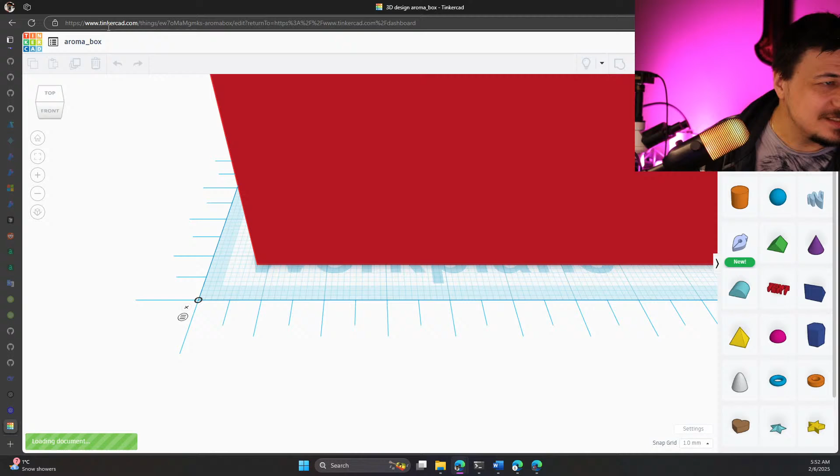And I developed some basic 3D stuff - very basic 3D stuff. It's very simple. Let me move myself to a different angle on the screen, maybe here. So yeah, you have that 3D surface here, 3D base, and you can just put something here and do things with it.

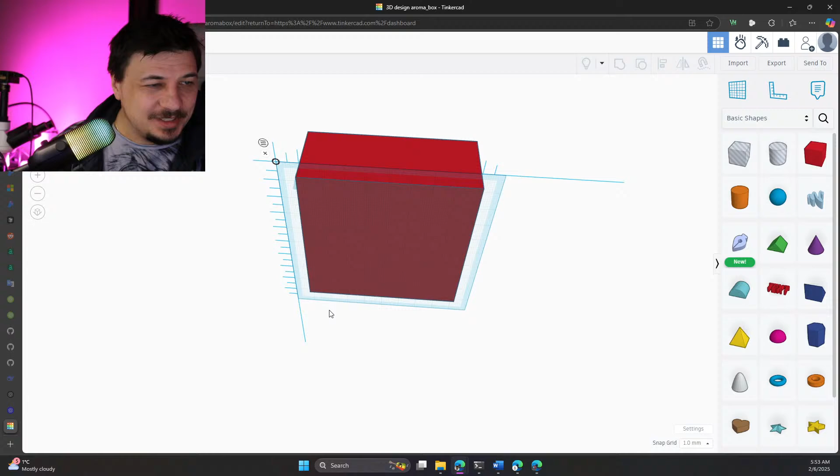So basically I created this myself today in just a few minutes. But the thing is, the beautiful design, after printing on a 3D printer, is slightly too small for bottles. I mean, they fit, but once they have something on them too, they don't fit. So yeah, it's not quite right for my table.

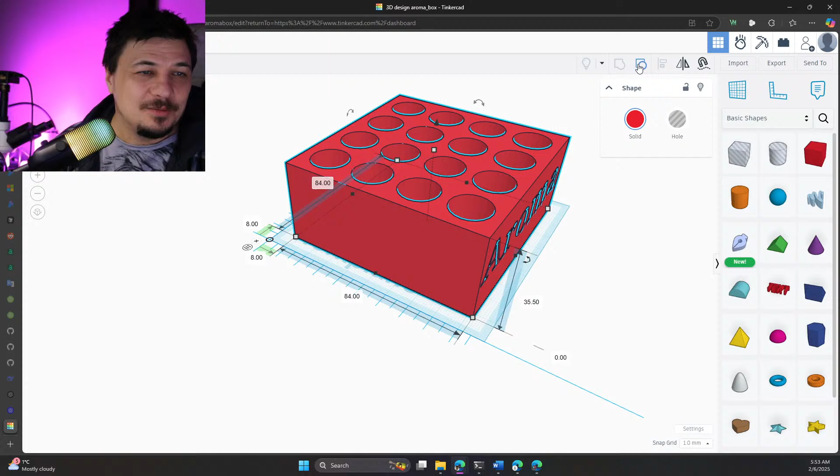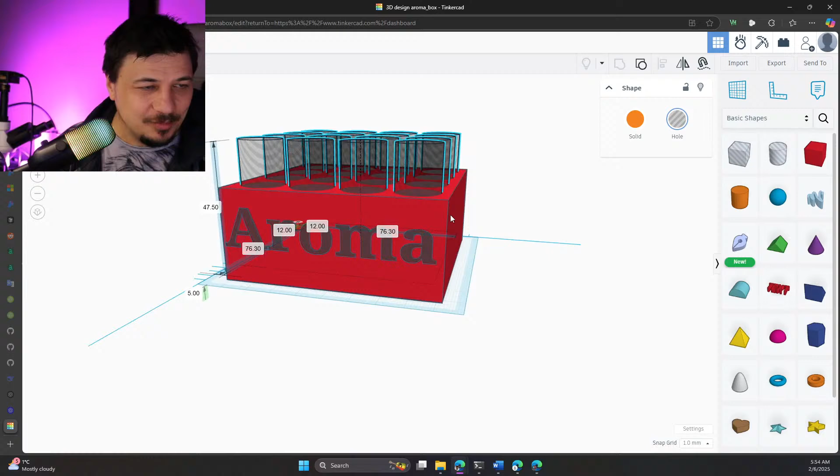So I decided to very quickly fix that. I need to ungroup it. And you see the cool thing here - if you, for example, just remove it, it will be removed. And because it's set as a hole, it's so simple to create even very complex things here. They're still grouped here, so I probably need to ungroup them before I can do anything.

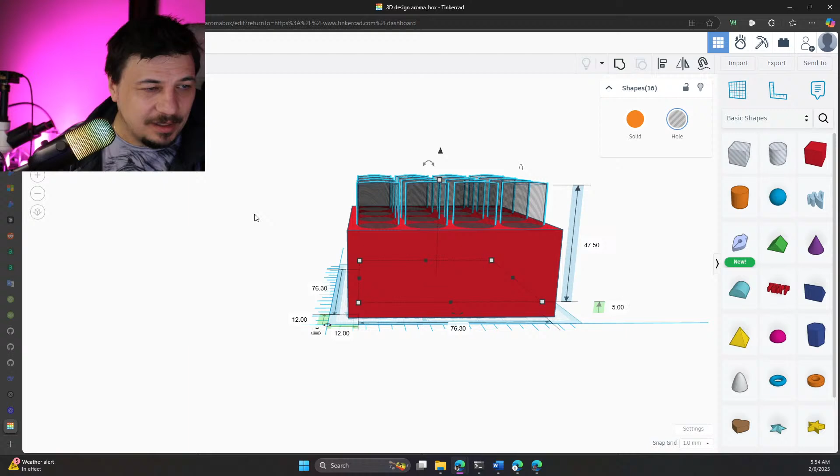Okay, now what? How can I choose only one single? Is it possible? I'm not good at selecting something here. Okay, now I was able to choose something.

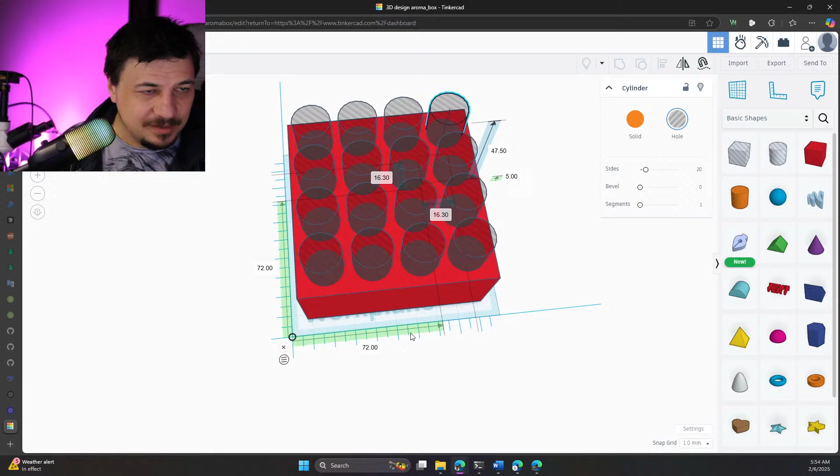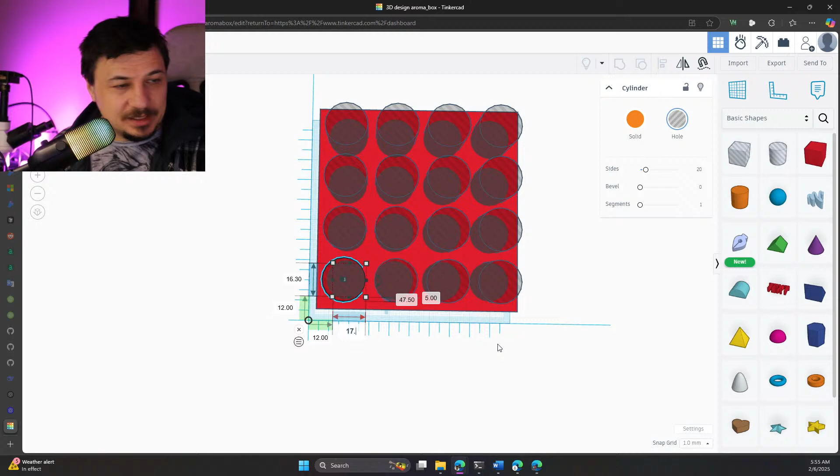Maybe if I go here, it's 16.3, 16.3. Okay, maybe I need to choose something more. Let me move it so I could see. Let me put like 16.5, and 16.5. Is it too much?

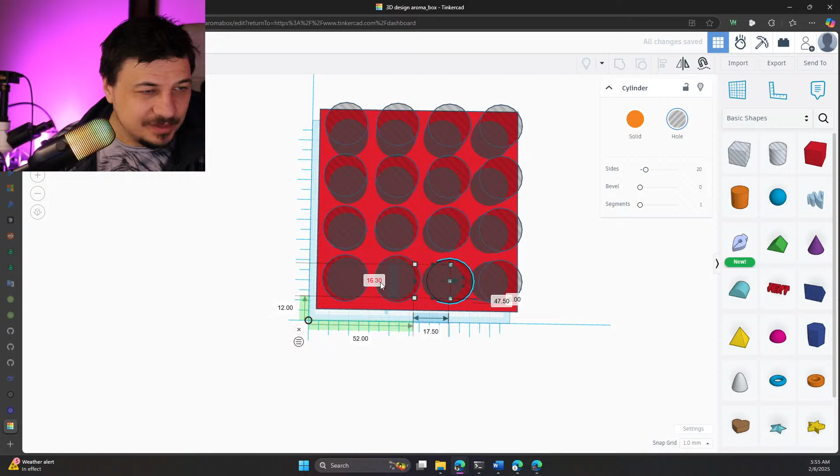Where is my point? Okay. Oh no. Yeah. Maybe I'm doing too much now because, oh interesting, I believe I changed everything for them.

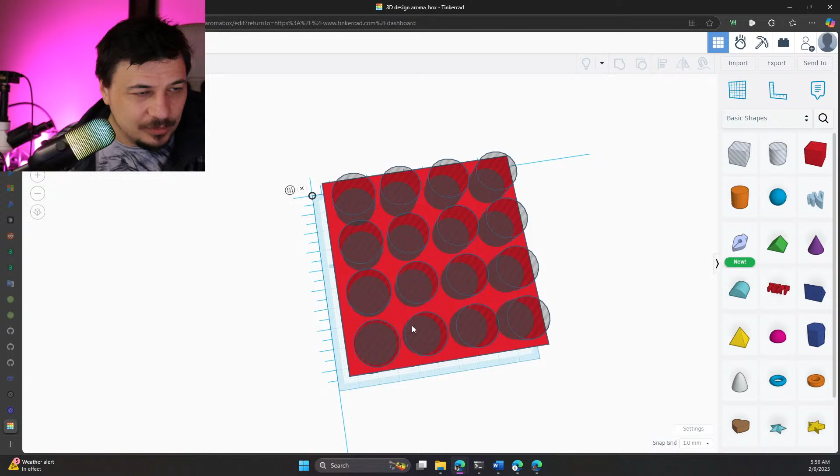So they still look valid, just slightly bigger, correct? 16.5 and looks good. Segments 1. Okay, because

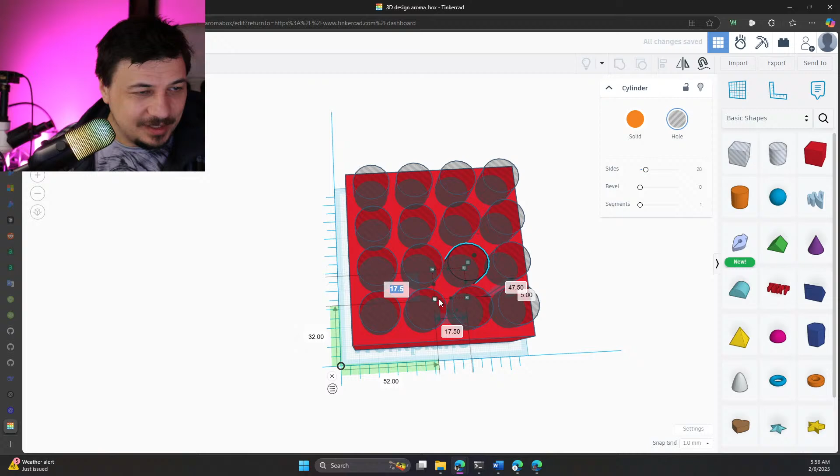I don't want to, so I just duplicated them last time. Yeah, I created a perfect shape and duplicated it, but it didn't - I mean it's working, but I believe now it would be just faster for me to go and change all the dimensions here.

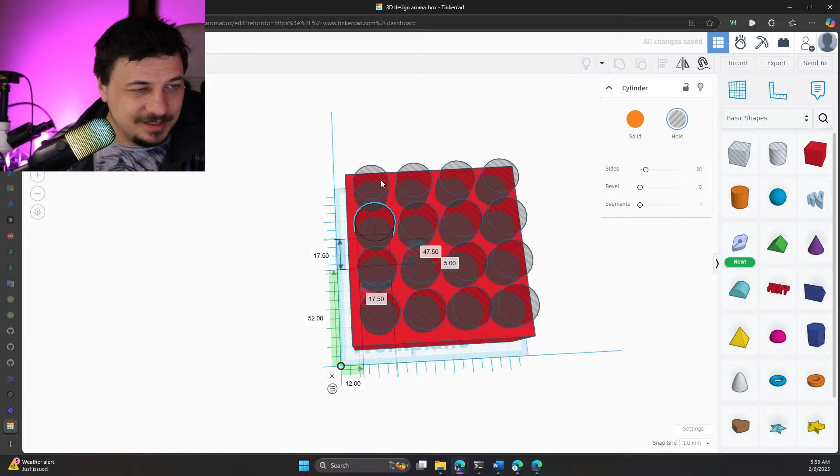And probably during one of the next streams I can show you the result, because it will not be printed in 1 minute - it requires about 2 hours of print. But yeah, my previous print was not exactly successful.

And let me see, maybe from the top, like this. And it looks - maybe it looks not bad. So 12, 12, maybe it should be 11 now.

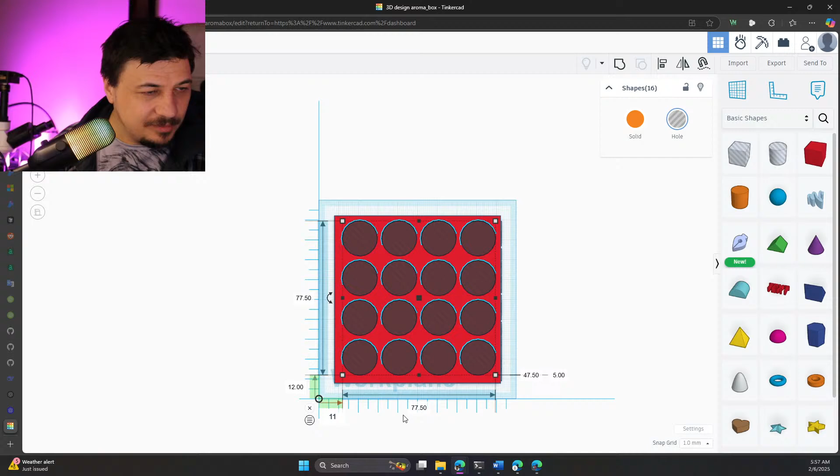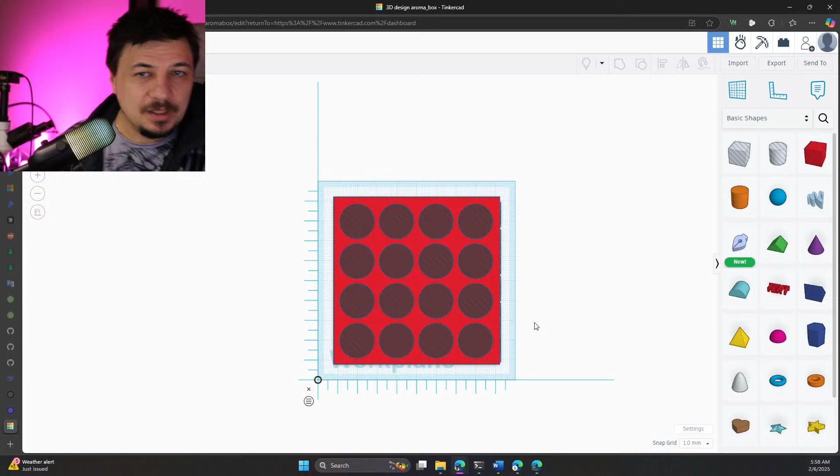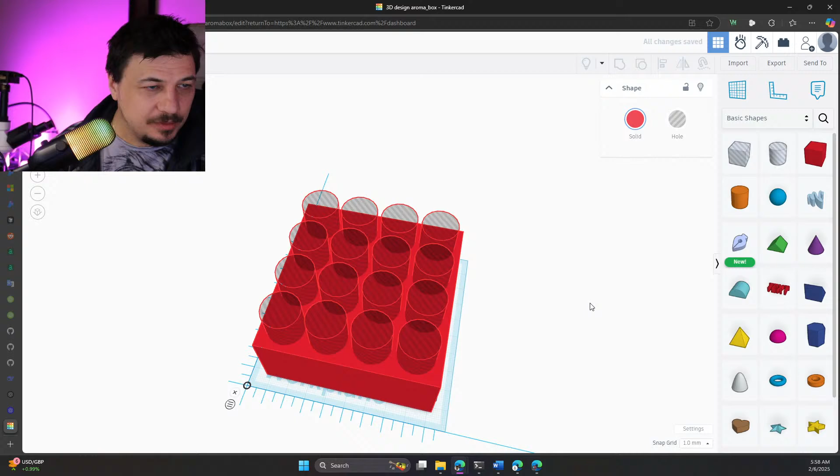Okay, they look more or less okay, and the aroma is here as well. Okay, so now if I choose all of them once again, group, now I choose those, and what else could I choose?

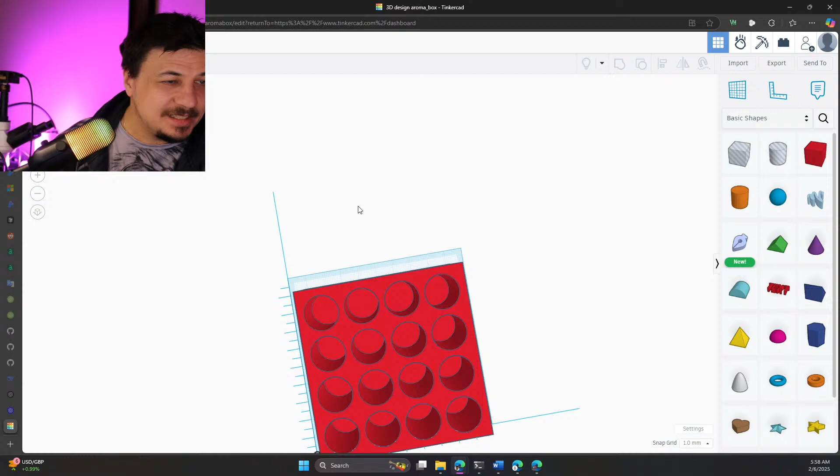So looks like now I have only - yeah, I created the design for one of my smallest printers, but looks like everything's not on my table. It worked well, but then I printed it on my other printer, and it was printed much faster.

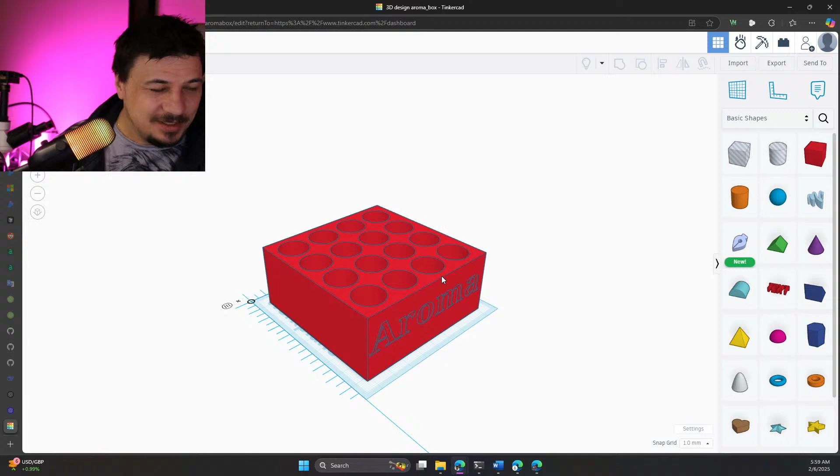And I understand, okay, looks like my bottle's not completely going in. It's for about 16 bottles, special bottles for diffusers, aroma diffusers at home, and they took a lot of place in some special box, so I decided to print something for them.

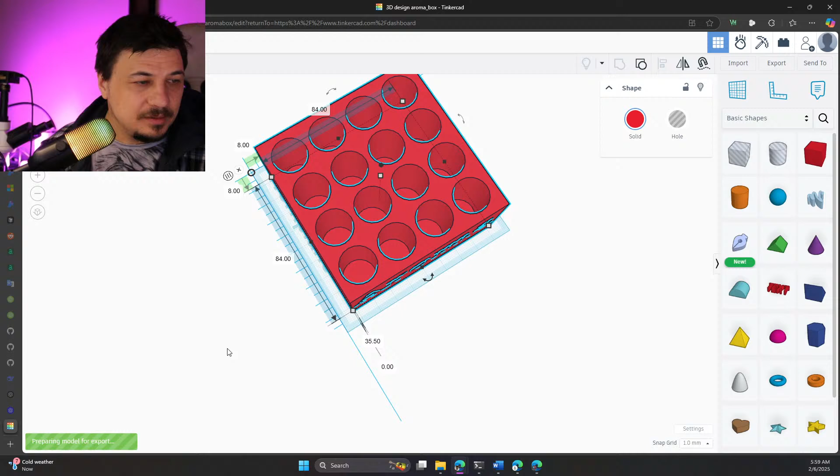Okay, now we could just export and say it would be an STL - let's call it aroma box, and it would be version 2. And that would be it. We say export in STL, and it's exported.

Do I have any program to do this? What is the program for my printer? I just installed it today.

Okay. Maybe I need to search for 3D. No, so not exactly software development, but related to some software stuff. Sync. Okay, it's called Orca. Orca. So I believe Orca is what I'll use right now.

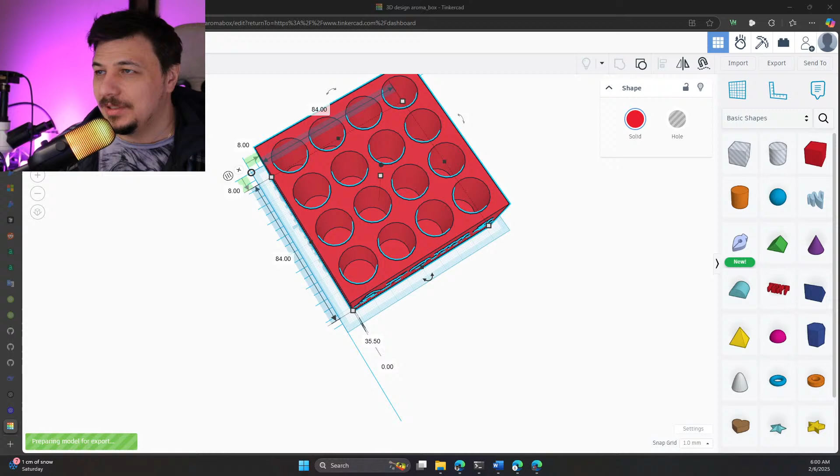I'll move it to the screen. And another thing, that thing is really, really great. So if I click, for example, new design - can you show very quickly - it's allowed to do everything. It's allowed to do custom sketches, it's allowed to use shapes from multiple things. It has a unique shape generator, and features, and it's allowed to do like mostly anything.

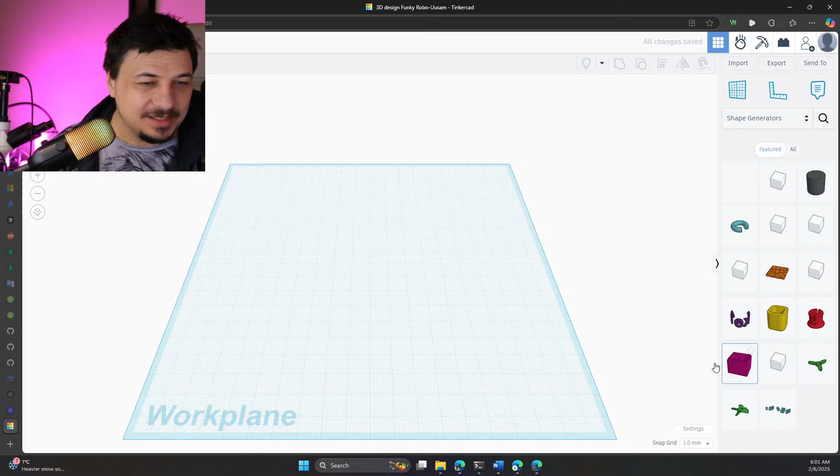Like custom box, for example - you could put some custom box here, please. Okay, you could make it bigger, and you see that is custom box 1. Let's see, 25 - let's make it also 25. Wall thickness, okay, and for that we will also do 25, 25.

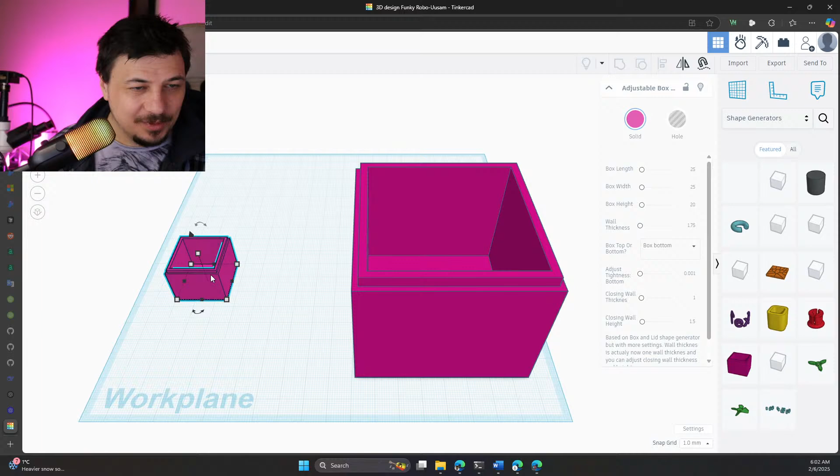But I did it wrong. Closing wall height - no, 25. And here, 25. Box height 20.

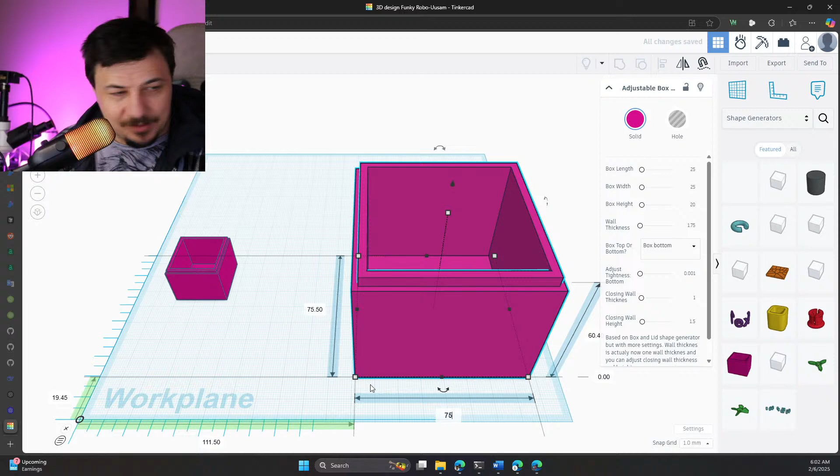Why are they so different? Okay, because I need to put a line here, and it would be 75. And that would be 75. We can do that the same, but here we can just choose box top.

Nice. And now we basically have 2 boxes - one is a big box, and that would be a lid for that box. And then we can add multiple other stuff.

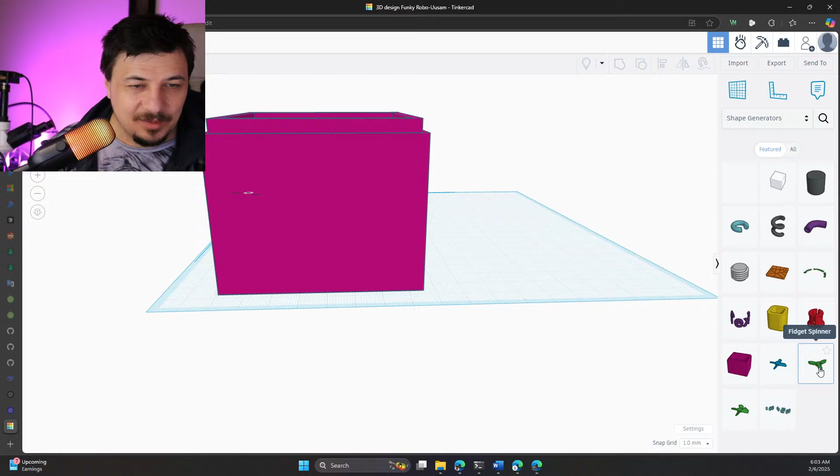I don't know why it's not loading some models here. Favorites - I don't have any favorites yet. Shape generator, and now slightly better, but still some windmill or some ISO metric threads, which probably also could - or some snap and socket. So you can put one snap and the other would be a snap hole.

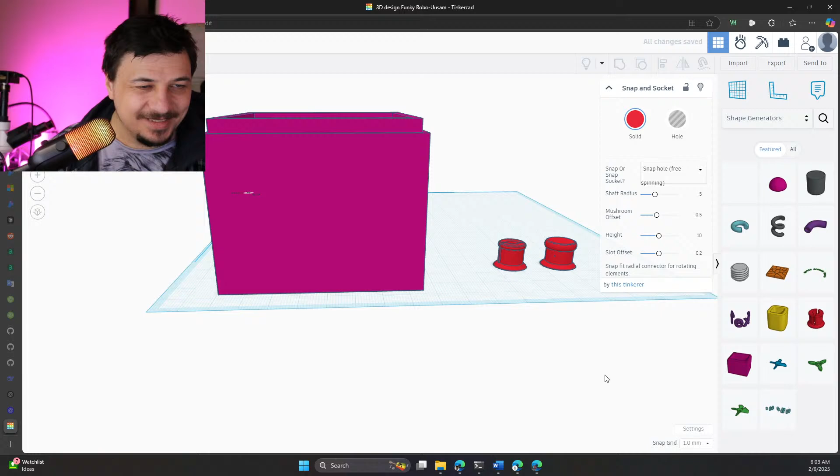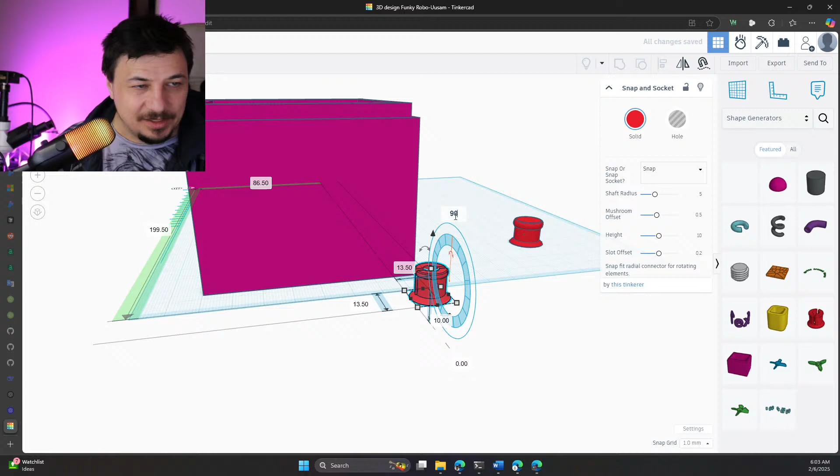And of course you're not putting it like here, you put it on some design, so you just need to somehow turn it, yes, like 90 degrees. Then you could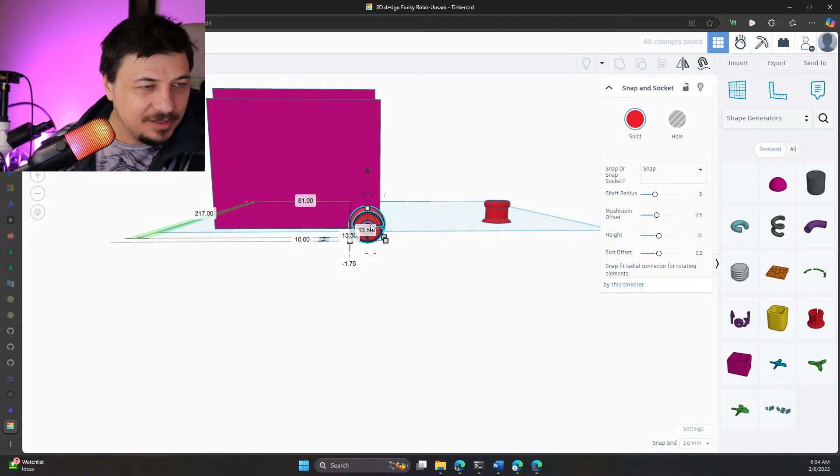So you could do everything with those numbers, because I put the ruler, but also you can use your keyboard probably to find the proper place, mouse, and let's use that thing. It should go to

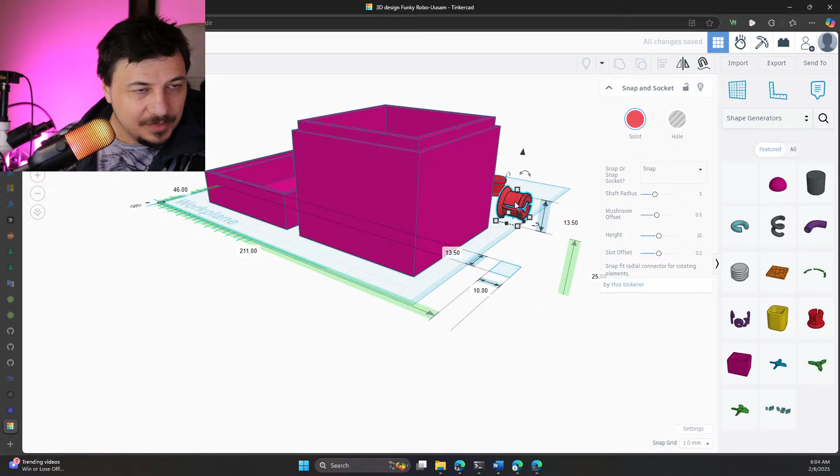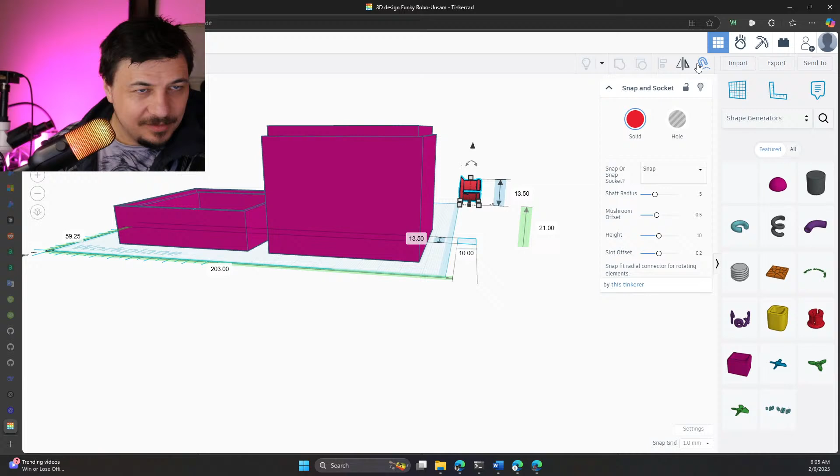I just need to release it now, probably like that. And oh, it's doing not the thing I expect.

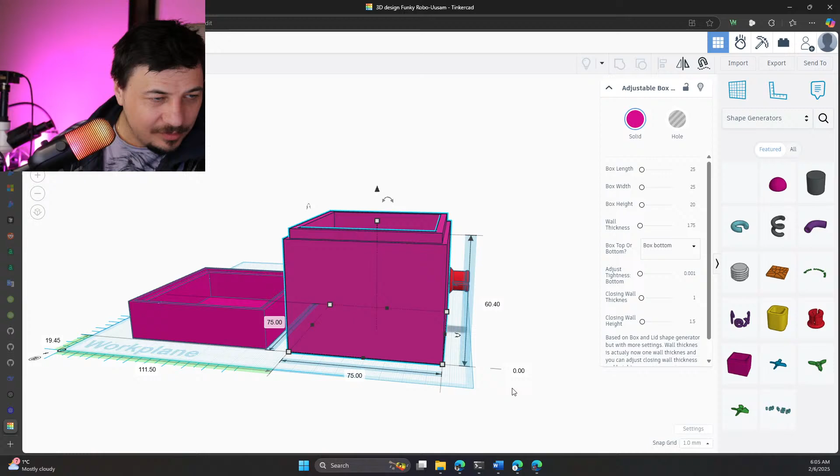Okay, anyway, you could do it with the mouse, as we said, so you could see the distance between this and this is very small, and you could just connect it, and then whatever you have that connector on could be connected to this one, which is a pretty cool thing.

And it's just one example. I'm still learning it, I just discovered this today. So many other things here, and if I do more shapes, there would be so many text options, so many possible auto-generated shapes for some development, some nice surfaces, snowflakes, cylinders, and so on. I believe there are maybe hundreds of shapes you can generate and use.

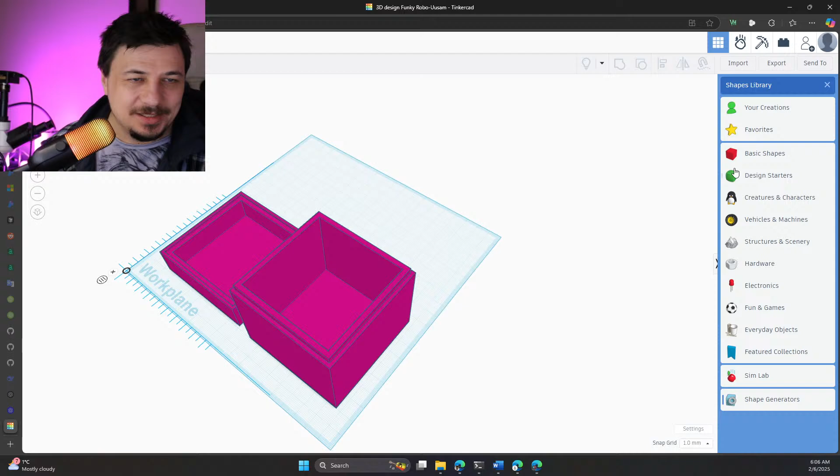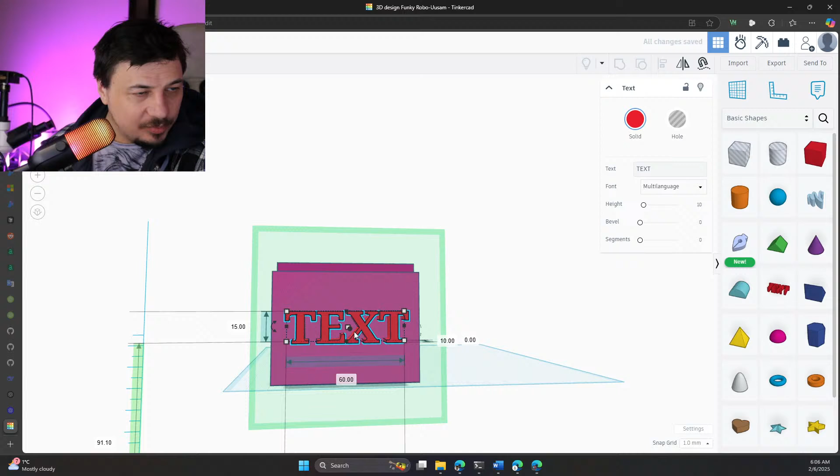And it's very, very simple principles here. For example, you could just use some text. You can put text on top, and maybe make it slightly smaller, like 60, maybe 15. Yeah, looks good, just put proper text. You can make the height slightly bigger, and say 'romantic.' Oh, it's too big text. Okay, 60, and height would be like 15. Okay, height 12. Nice.

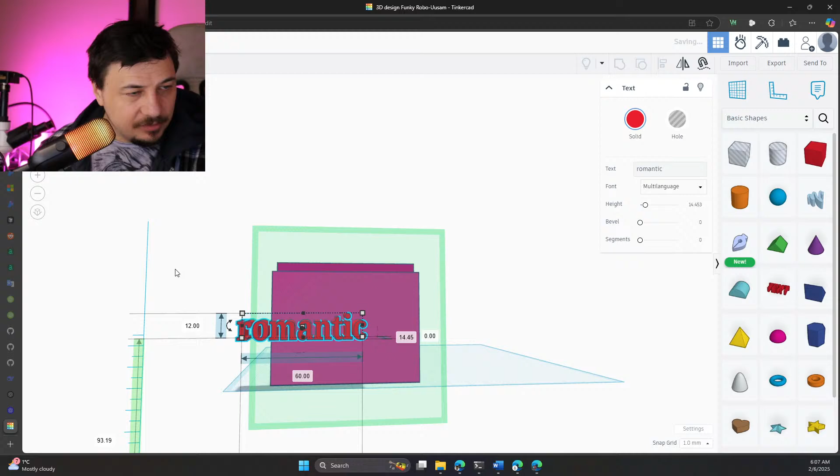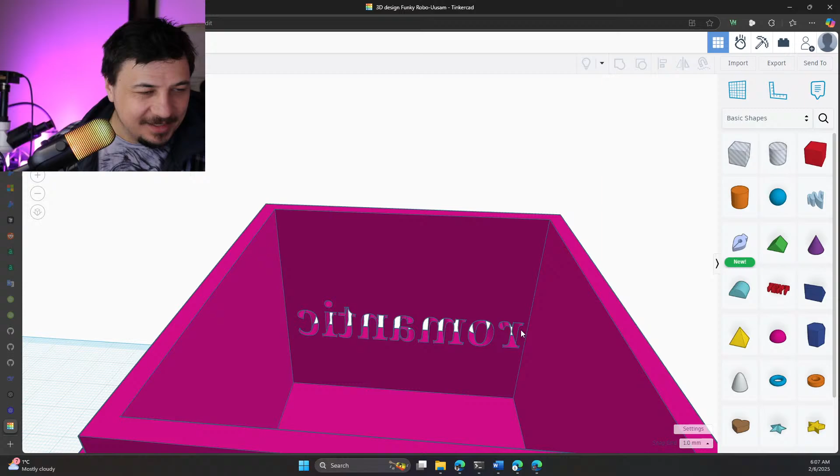So yeah, that's what you do, and maybe it would be hole, and when you move it to the inside like this, nice, and you connect and say I want to connect that. You will stop looking at the shape, but you will see that it's now that 'romantic' here, and it doesn't enclose in the box, so it's nice. You can put a mouse here and it has something to breathe because it's romantic here.

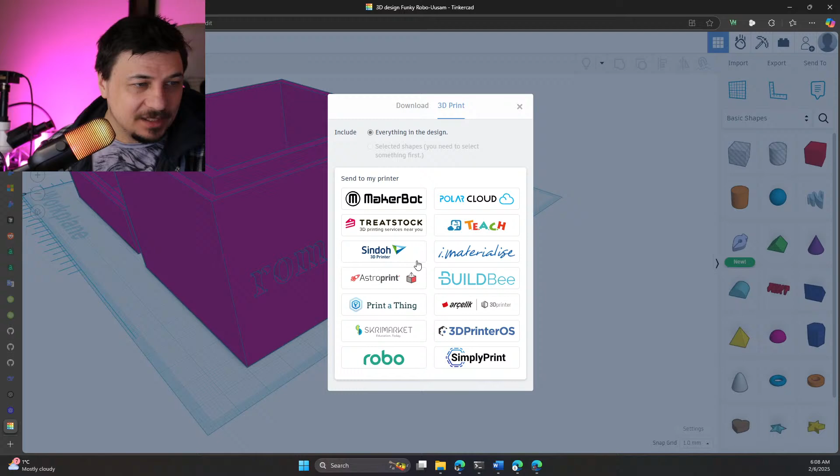So again, as we said, you can immediately export into some of these formats, or even 3D print if you have a connection to one of those clouds, or send it to a company which sends it to you printed, and that's it. You can have a nice box with 'Sport Romantic' on it.

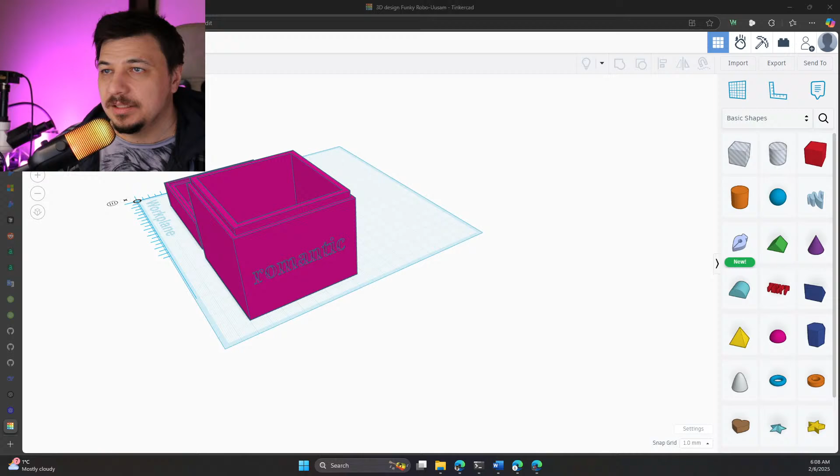Okay, and for me, I just did today one of the projects. So I'm just creating a new project, and I need to add another one called Aroma Box number 2. Where is it?

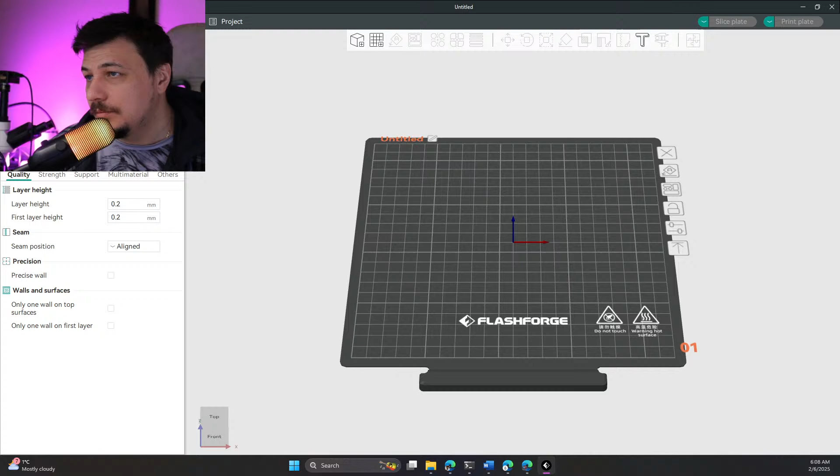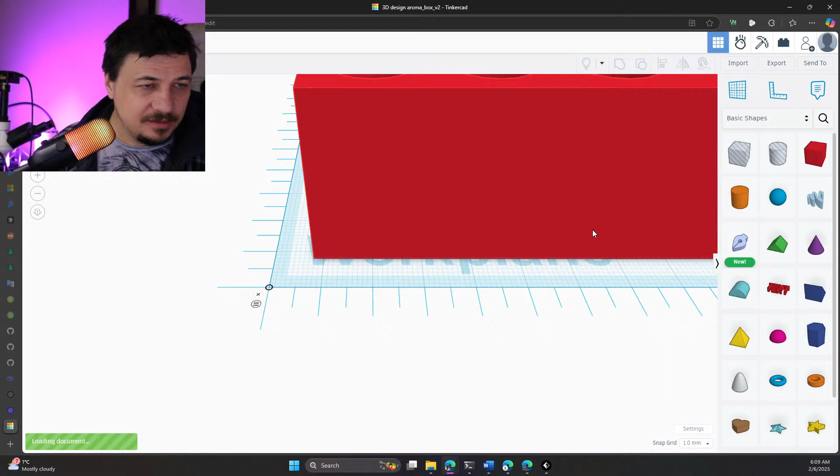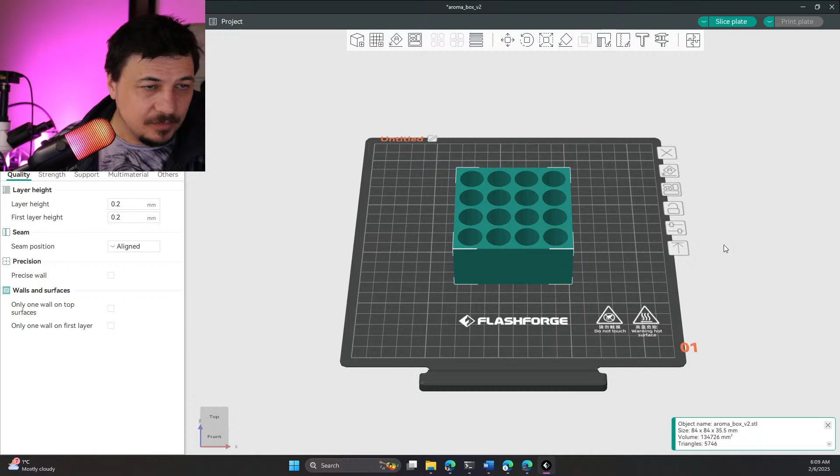So let's double check. We have Aroma Box number 2, and we said to download it, correct? So we set export to STL file, preparing Aroma Box version 2. Okay, and now if you say load, okay, now I could see that. Cool, so basically I believe that would be it.

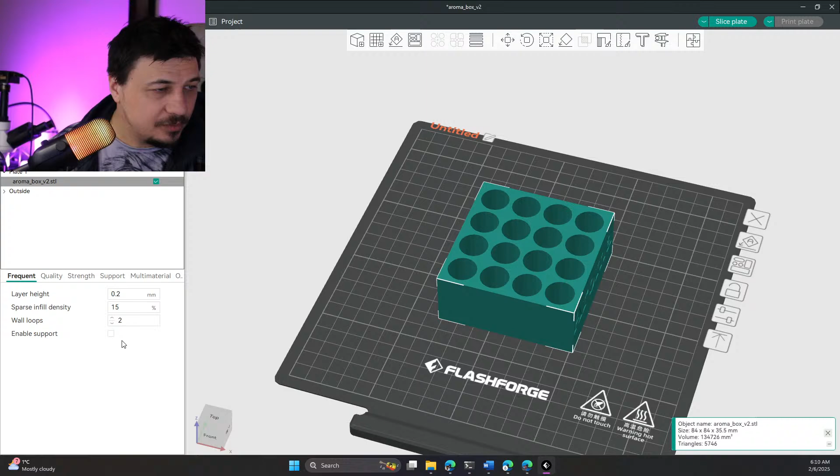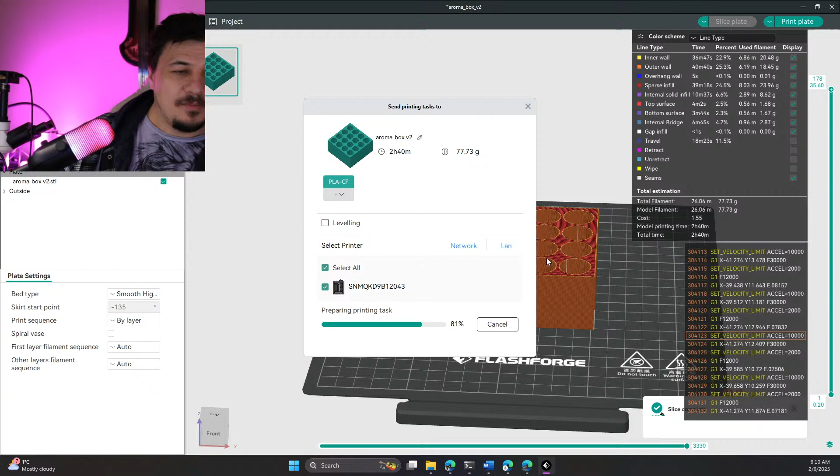Okay, and we can send it to the printer. Hopefully it would be connected. Yeah, looks like it. Nice. Okay, that was a very quick thing to fix. But yeah, I'm basically slightly obsessed with that thing.

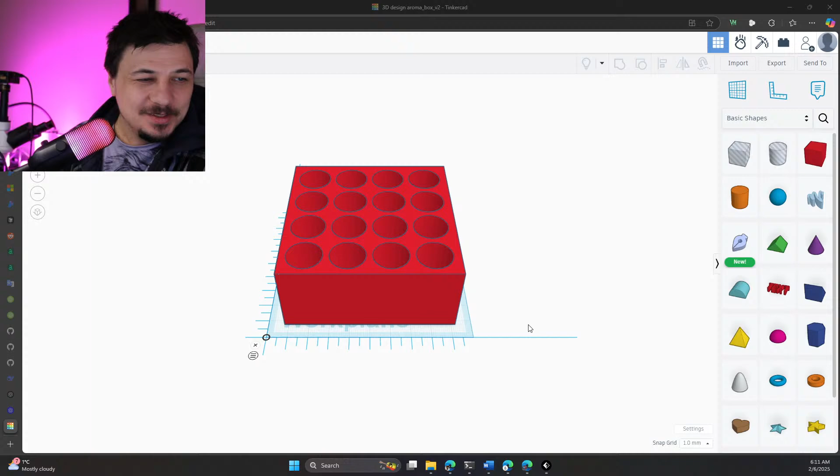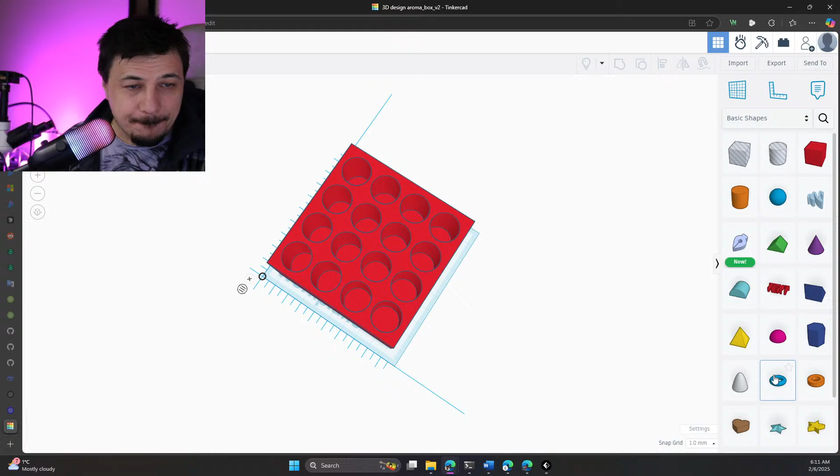It's so nice and so simple that you can even change the form of that, probably. No, it's already a form. Okay, so to change the form of that to be more nice, we probably need something like...

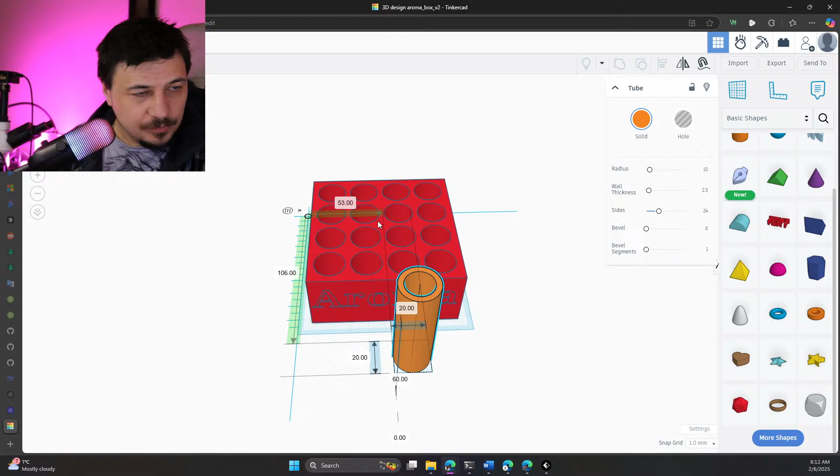Maybe like a ring. Tube is also fine. Let's make it like 40, like maybe 60. So maybe we want to make it bigger, like maybe 70. Maybe another 70. Okay, now we want to somehow divide it.

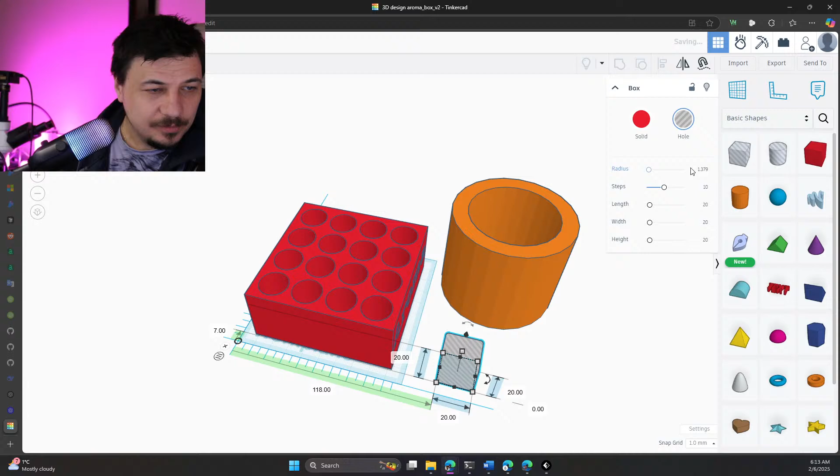Do we have something like a line here? No, no line. So why does it have a radius? Okay, it also has a radius. Oh, radius, yes, that's what I'm looking for. I see.

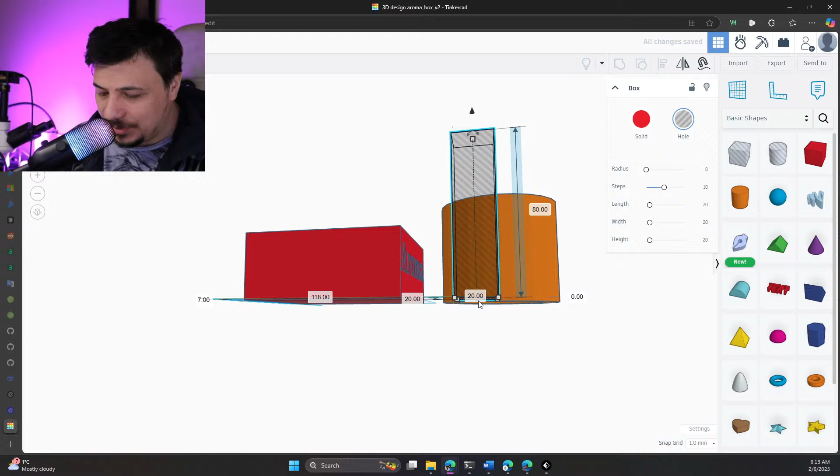So let's try my approach. I'll make it bigger, like 80. That would be 0. That would be 0, nice. And that would be also maybe 80. Okay, and we will just cut some of this tube.

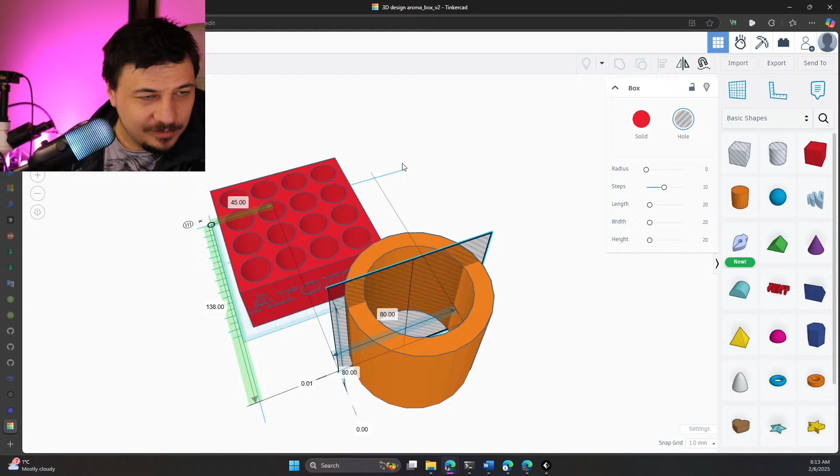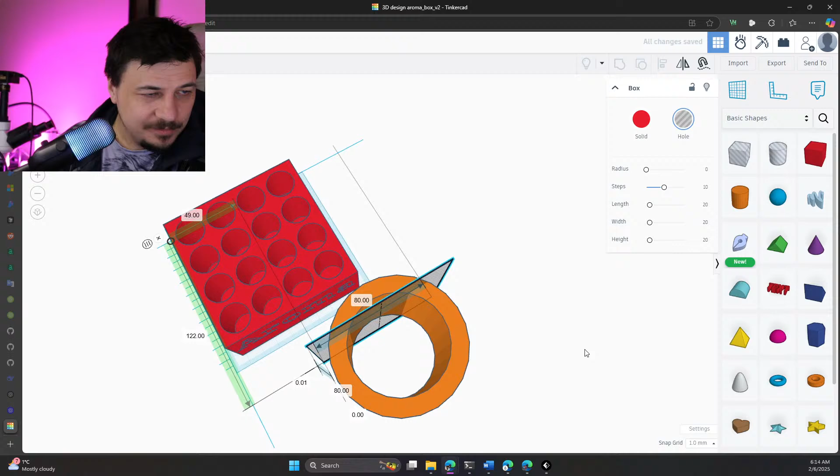Maybe something like that. Okay, and now if we... oh, too much.

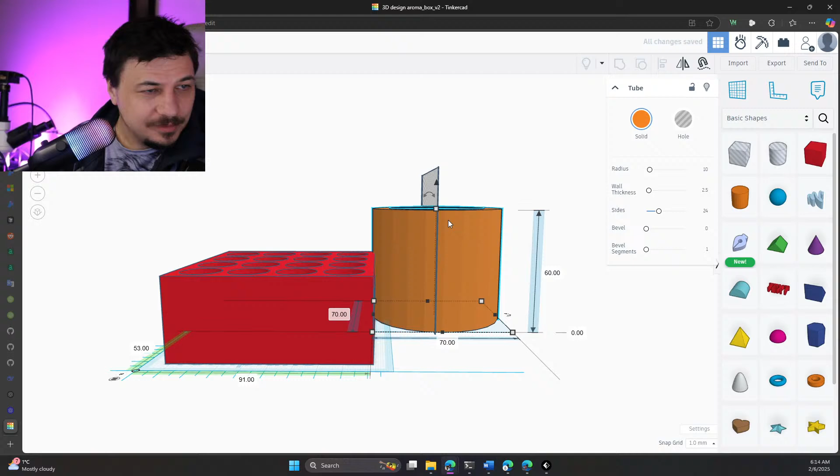I'm still experimenting, not sure what's going to happen. If I press shift and some keys, so this and this... oh, could I connect this and this?

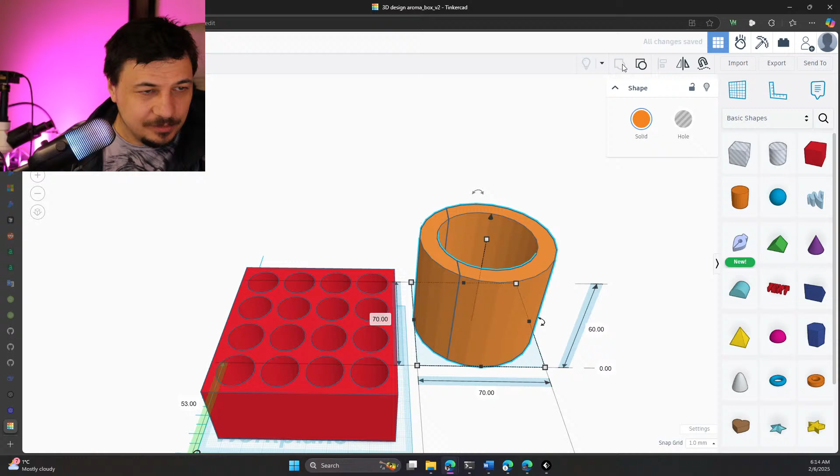I could. And what's going on? It's kind of divided it. Oh, I see, I see.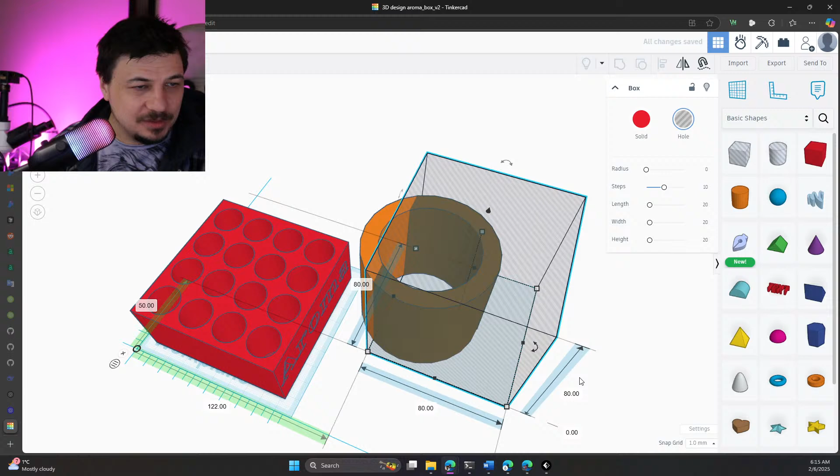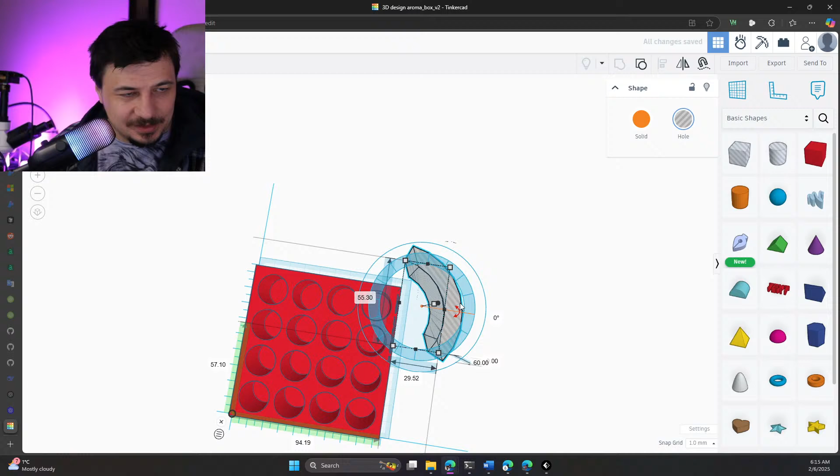Oh no, okay. And then if I could move it here...

Not exactly what I wanted. Um, but what if we make it even bigger, like maybe 60.

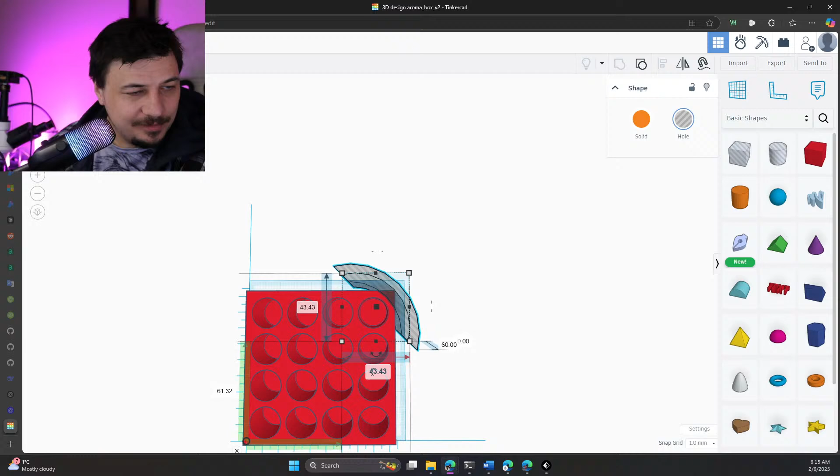Or we need to make them smaller, like 25.

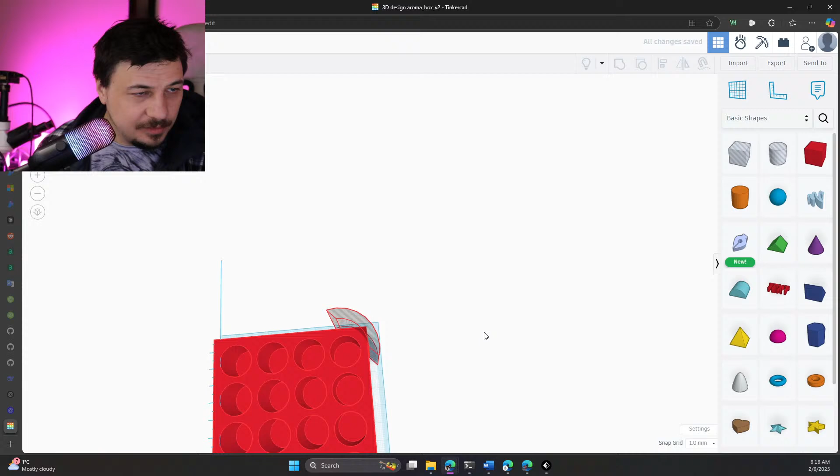Yeah, and if I combine, so we will receive like some smooth angle here, but it's too complex. It's too complex, but at least we received something.

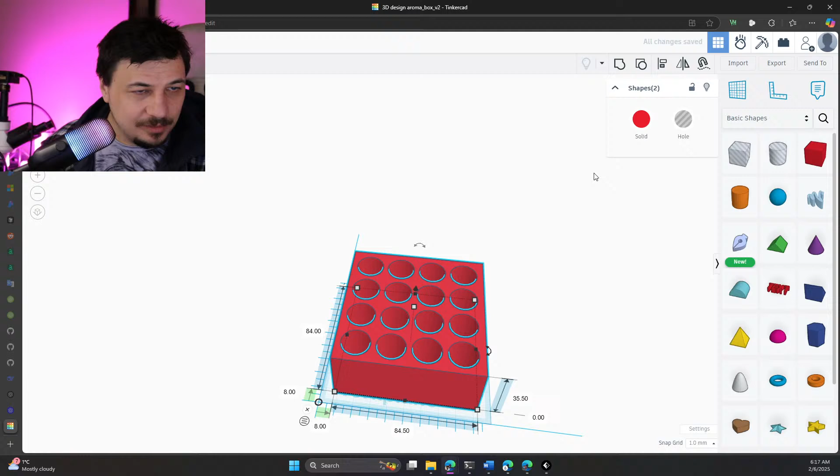Of course, we could now remove it, and we can click here, in that basic shape... where is it? We can reorganize.

It's still, we need to go here and say radius. Oh, really?

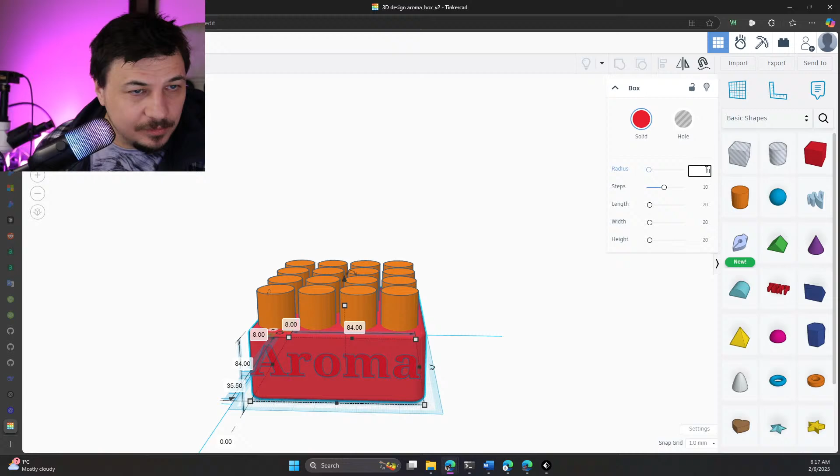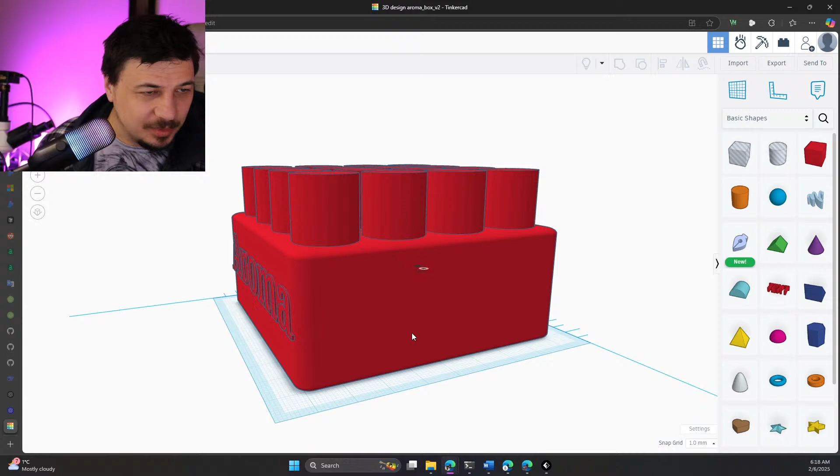Okay, does it mean it should be now number 3? Okay, now it's not inside but on top, that aroma. Oh, what's going on?

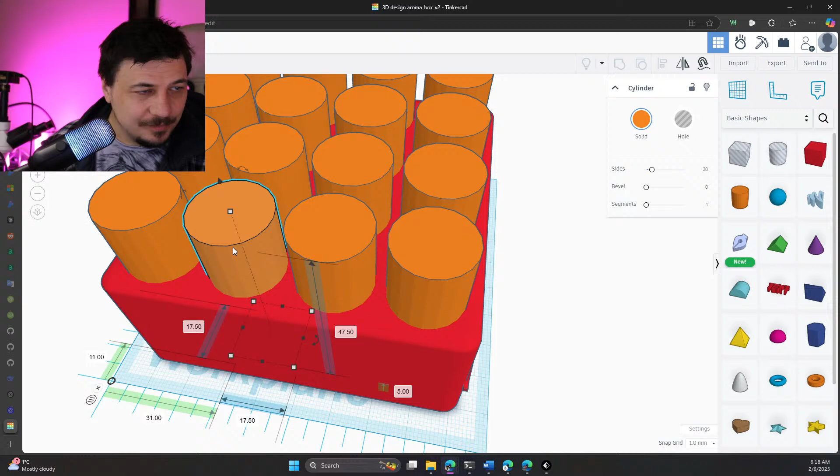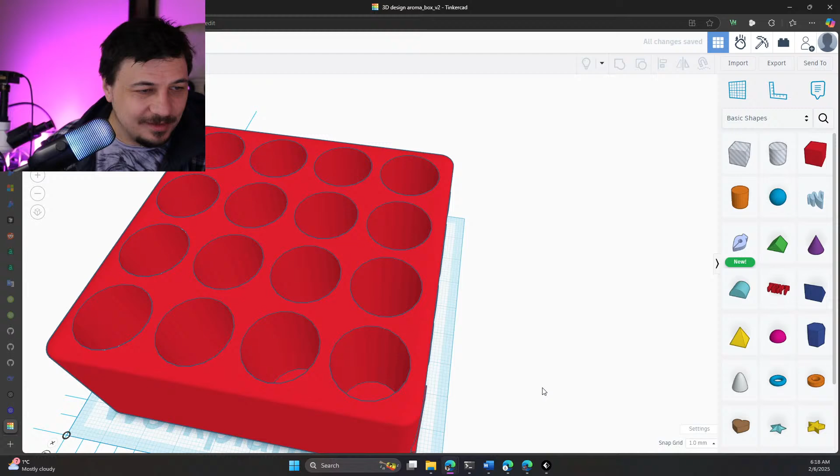My shapes become not holes. Okay, looks like my printer started to print. So holes - oh, now it's looking better. Connect everything, combine. Okay, good old sync.

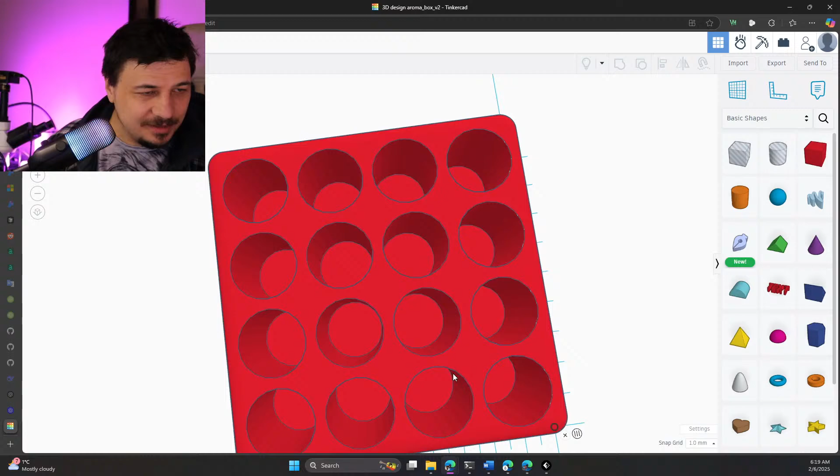So aroma, and nice angles, smooth, and here as well. Yeah, looks good, and that would be box number 3.

Okay, let's see if that box which is printing right now will not work. We have this box now. Okay, so...

Yeah, I believe we already have a lot of time, and I think I'll finish on that. Sorry for not doing software development, but creating something, some very simple AutoCAD in your browser, which you can use completely for free, and it supports so many features which I still need to discover.

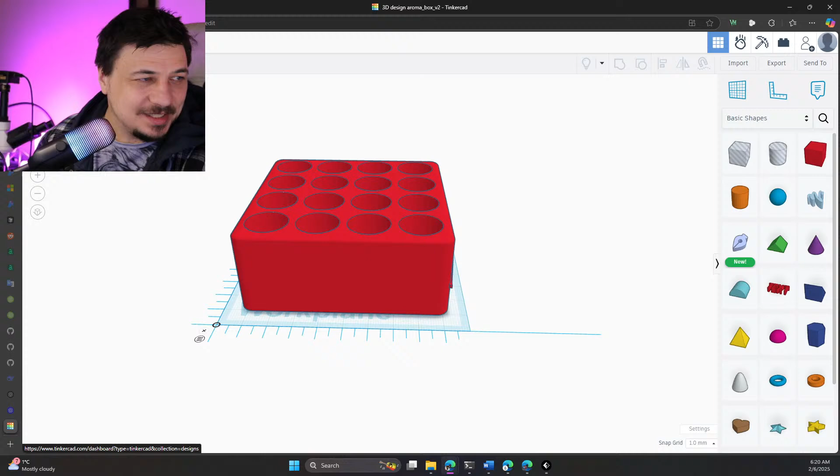So they not only support that AutoCAD, but if you go here, you can choose other things, and of course it would be not only... do they have something like resources? I believe they have not only this, but they also allow you to emulate and learn any circuits, be part of multiple projects.

And they have a very cool gallery probably, and you see they have some projects which are functional and cool, and they built in those programs, I believe. And maybe they have also some circuit you can also open and test, etc., etc.

So of course, maybe it's something childish, but in many cases, when you need to create something very quick in 3D, it's a really very cool application which provides so much potential actually.

Okay, they don't pay me, they completely don't. Believe me, I just was inspired by that application today. I just couldn't stand to not share it with you.